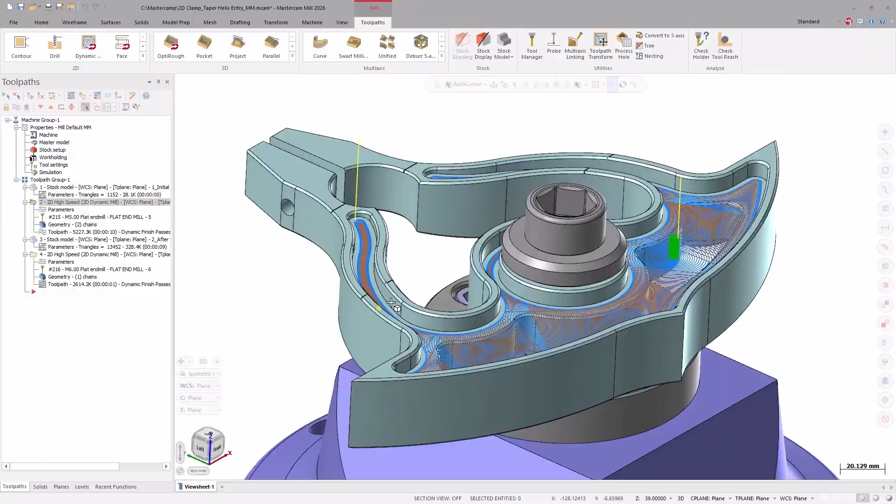Let's take a look. On our part here, we have a dynamic toolpath clearing out our first pocket. Next, we have another 2D dynamic toolpath cleaning out the deeper area. For the entry motion into this deep area, we have a helix. This is a great way of getting the tool to the bottom of our depth.

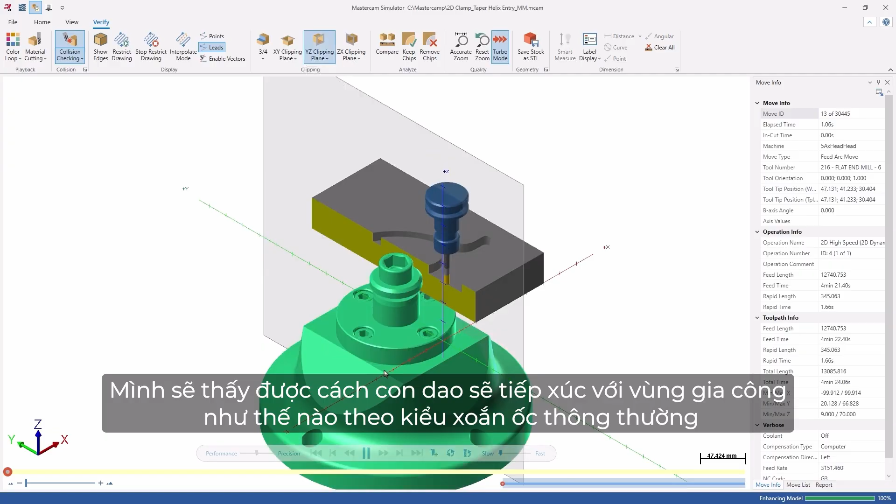When we go into the Mastercam simulator and we utilize the clipping plane, we can see how the tool enters the material using this helix. The challenge here is that once the tool gets to the final depth for this pass, the dynamic toolpath starts working its way out by immediately engaging into the material.

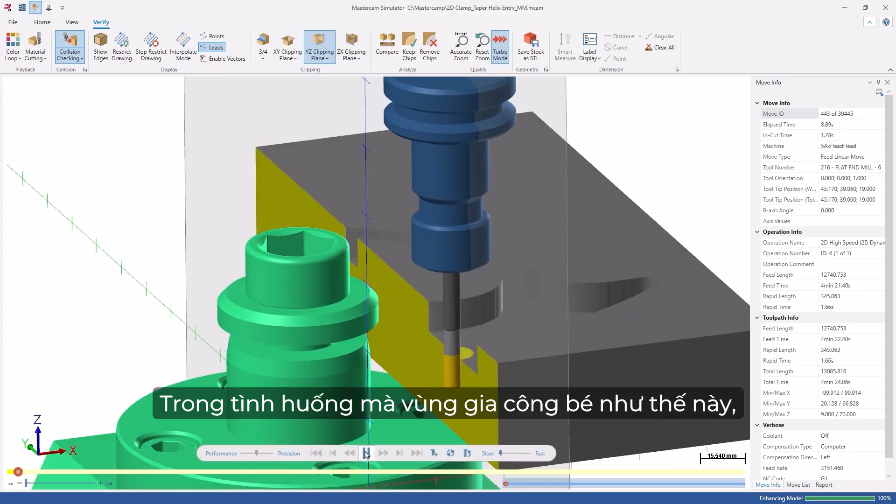This is a full flute-length cut, and with this, we get full-length chips that need to get evacuated. In this scenario, with this small area, it's often difficult to get the chips out and coolant and air in. In Mastercam 2026, the option for a tapered helix helps with the chip evacuation.

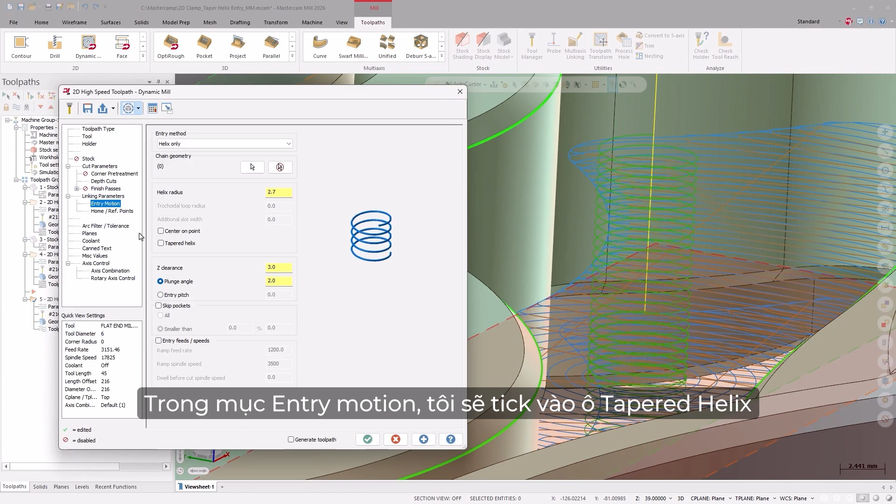Let's see what a tapered helical entry shape does in our simulation. Let's copy this toolpath and make a simple change. Under Entry Motion, I'll enable the Tapered Helix checkbox and regenerate the toolpath. If we look at this and verify with the same clipping plane, we see that at the bottom of the pass, we have the cone shape from the taper.

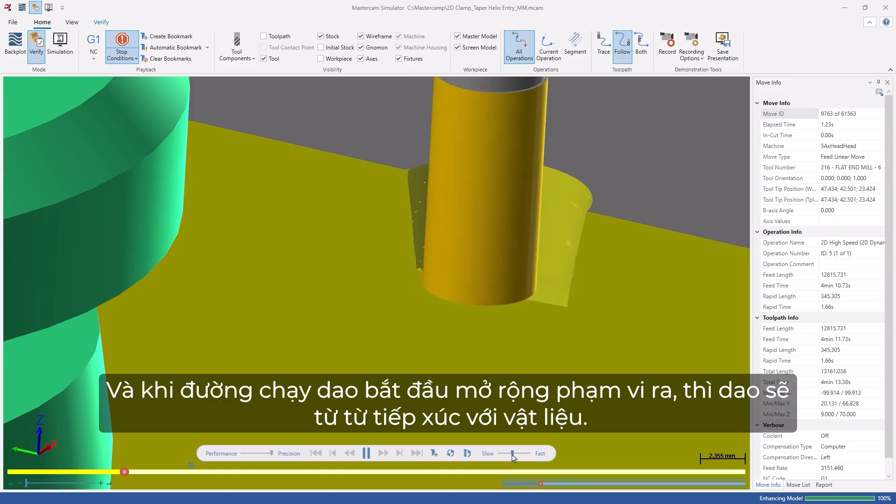And as our toolpath starts to expand out, it is slowly engaging in more material. So the first few passes here have smaller chip lengths, which is going to make it easier for the chips to get out and coolant and air to get in. It also eases the engagement of the tool as it steps over into material, because we have this nice stair-stepped scenario where the tool gradually works up to the full depth of cut.

This enhancement is available in both 2D dynamic and OptiRough toolpaths. As you can see, this functionality greatly improves our ability to enter in a material while gradually engaging in a full depth of cut.